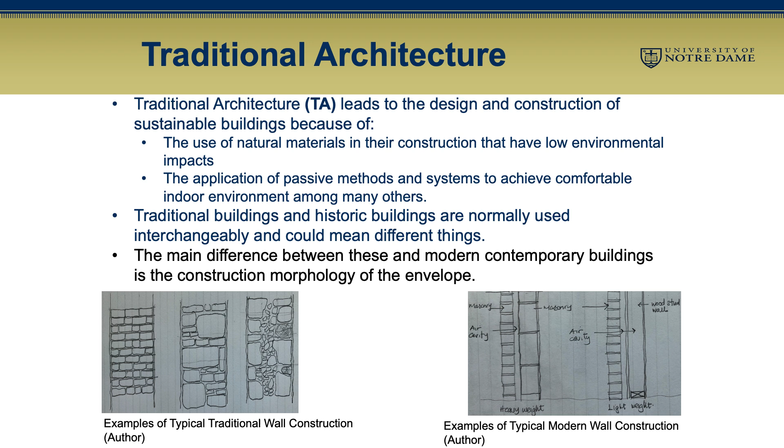On the right side is today's modern construction. We have other CMU with a gap in between. We put insulation and you put a facing on the outside. Or you can have a lightweight construction, then we put insulation inside it, and then you put facing on the outside. This is typically how we do a lot of buildings today.

Now, I am glad that ASHRAE, the American Society of Heating, Refrigeration, and Air Conditioning, which drove the air conditioning system, have come to understand and appreciate that comfort is not just what you measure, but how you feel satisfied. So they have this PMV method for measuring. But there's also the issue of indoor air quality, which talks about the range of temperature and humidity that human beings actually find acceptable.

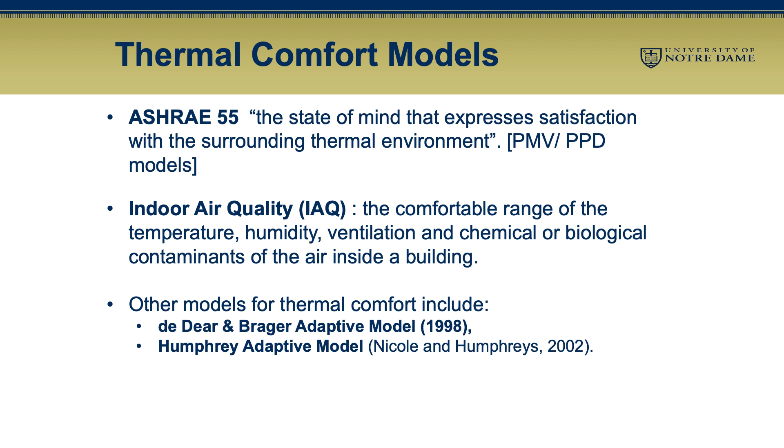Now, people like de Dear and Brager, and also Humphrey, looked at work in India. They said, how come people in India seem to be just comfortable in extremely high temperature according to ASHRAE conditions? And they realized that there's a slight gap in how those models work if you look at it mathematically.

If you look at the lines there, the range of thermal comfort is given by that gap in the middle—that's what we call thermal comfort. The one that is green is buildings that are air conditioned, showing sensitivity to both temperature and humidity, compared to the blue one, which is a naturally ventilated building, where you can accept much higher humidity and higher temperature.

Here in Charleston, it's humid. In the summer, with a porch and a fan, you can actually accept a slightly higher humidity and higher temperature compared to if you live somewhere else in an air-conditioned building.

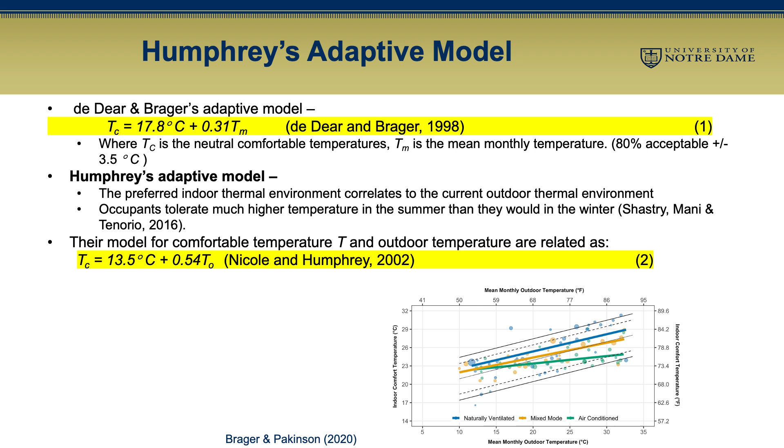So energy performance of buildings here looks at the idea of estimating performance of a typical wall. And the big change is that as we measure existing buildings compared to what's assigned, we find there's a very big value gap between what is published of the material behavior and actual material behavior—which means, should we trust the value they give us for those performances? There's a gap there because it's not just the material, but a material in combination with other things.

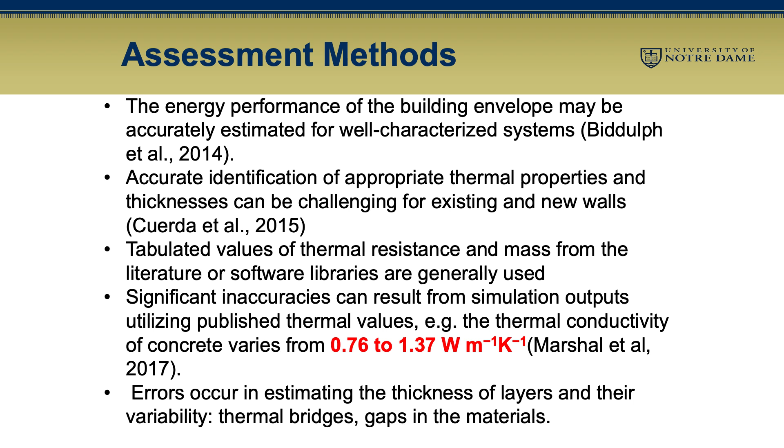So if you're using CMU, for example, or brick, they're giving you a value of brick. They don't add what you use to connect the brick together. They don't add how you connect them together. And that's why there's a lot of faults in this calculation.

So here's an example of different materials. Let's look at highlighted number 9. Paper number 9 looked at thermal plaster, thermal block, and plaster. The thickness is about 0.45 meters, which is about 1.5 feet. The estimated value based on the assigned value is about 0.32 watts per meter squared Kelvin. But actually, when you measure this, it's actually 0.56. So there's a lot more transmission going through than what is being given—there's already a gap there.

If you look at plaster hollow clay block, the estimated value is 0.42 to 1.5, and when you go and measure it, it's actually much lower—so traditional buildings are being assigned a higher value than they actually have. Gypsum rammed earth: estimated value given is 1.58, measured value is 0.35, a very low transmission. Therefore, traditional buildings are not being given the correct assignment based on what is actually measured.

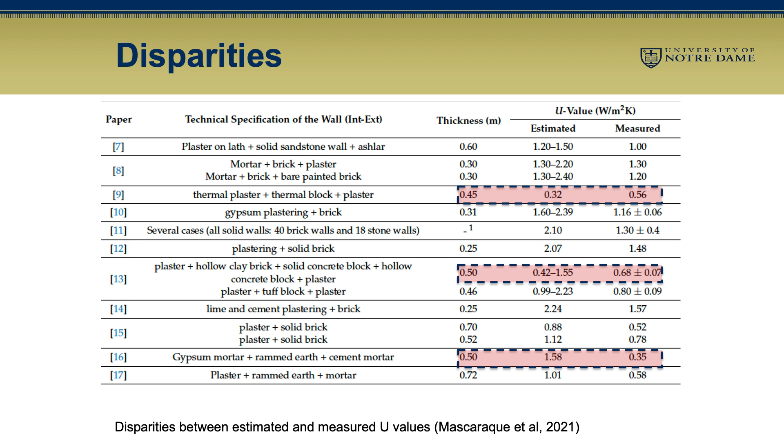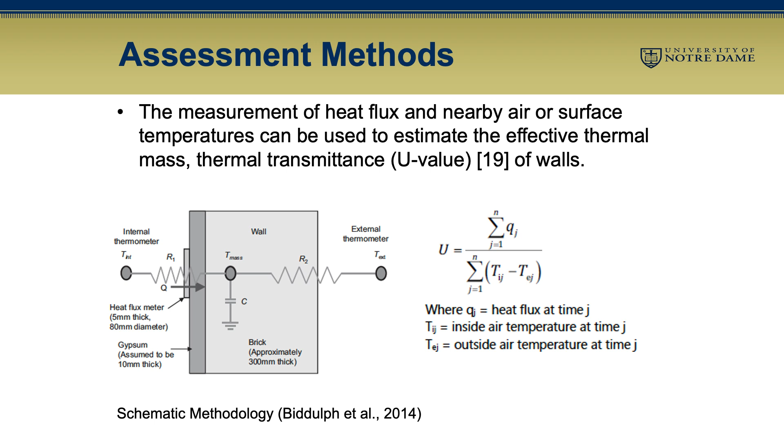So a fundamental way in which we measure these things is very simple. We look at heat flux. We put a sensor on the outside, sensor on the inside, and we measure the temperature differentials. One of the things that we don't quite do with the instruments we use today is to measure how much

energy is absorbed in that particular wall and then radiated. I currently have a PhD student from University of New Mexico who's grappling with this because he's finding that adobe buildings in New Mexico seem to be having a very high U value, especially when the sun goes down, because the sensor on the outside is radiating the heat, and therefore it's telling it that there's actually heat loss of the building. When actually in reality, what it's doing is radiating what it had absorbed, which has not gone on the inside. And therefore we're looking at how can we find a way of calculating this and add this to the system to make sure that we can correct this value there.

So in India, we looked at Guttu buildings. There's several of them in India, about 324 of them. We just looked at only 4 buildings in particular. These buildings reflect the local character in southern India. They're in Mangalore, and they're typically courtyard housing, mainly because the place is hot and humid. Courtyard also because of culture. There's a different level of different groupings of people who can access the house. Therefore, the building actually is layered for different reasons.

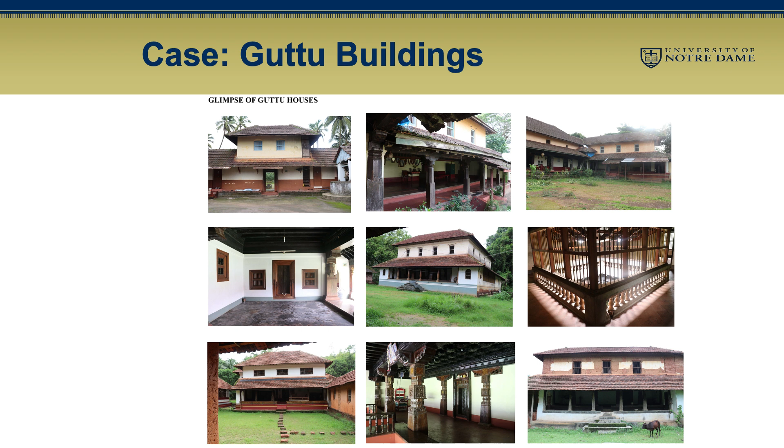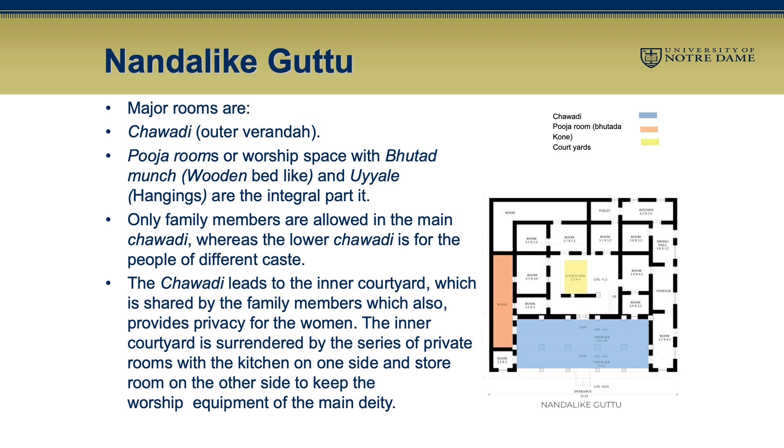So here's examples of some of the Guttu houses. Very simple, they're very large, but can be designed for very small buildings. Traditionally, what you see here is a courtyard in yellow. The front is a porch, and then the rooms surround the building, one layer thick, sometimes two layers thick, but they have natural ventilation right through them.

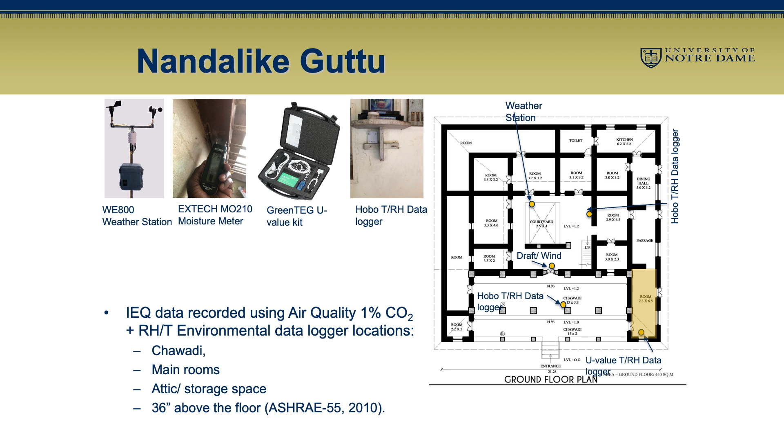And what we did was we put sensors through the courtyard to measure the local temperatures, a weather station. We put sensors to measure indoor air quality in terms of temperature, humidity, and lighting in different locations. And then we put a GreenTEG U-value kit to measure the U-value of those particular walls in 2 locations.

And what we came up with at different times of the year, we measured this over the summer and over the winter. We found out that if you were to use ASHRAE air-conditioned buildings, basically what you're seeing here is that because the building actually has thermal mass, most of the temperatures are falling within what you call thermal comfort. If it was air-conditioned, then you're forced to air-condition that area because they're saying it's out of the range. But in reality, they're very, very comfortable.

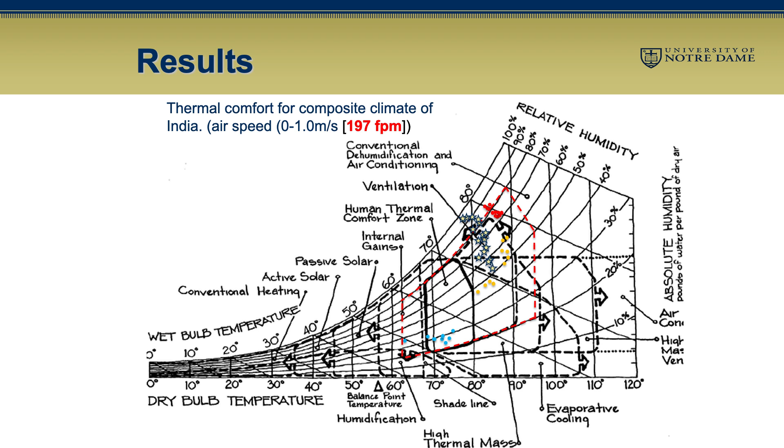The other thing that we see here is that if we go and look at a model done by Olgyay, he did this model in 1963. It's quite an old model. He looked at buildings in Iran, buildings in Turkey. Olgyay was from Turkey when he came to the US to do his PhD. So he looked at these particular areas and said one of the most interesting things in comfort is that if you have wind flow, air movement, then you can actually be more comfortable than at a higher temperature.

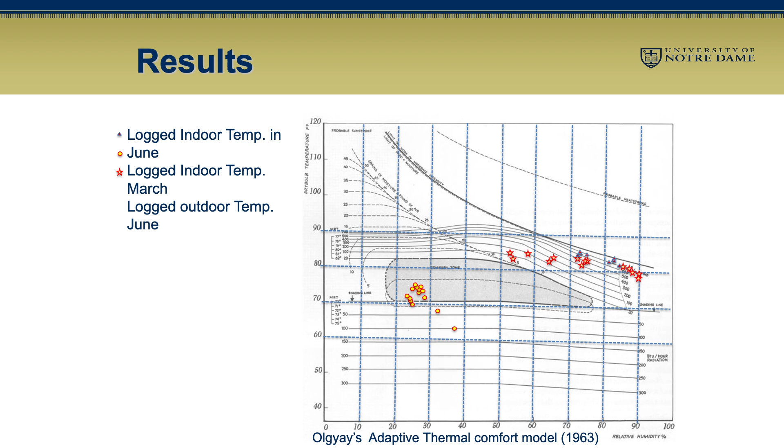So if you look at the range of temperatures in India, for example, over the summer they were actually quite high, outside the gray area of thermal comfort. But because there's air movement, you can tolerate that amount of heat. And that's why when you come down to Charleston in the summer and you walk out of the building, out of the hotel, you start going like this. You're actually increasing airspeed across there. That's what this is doing.

And that's why buildings in the South are adapted to have porches and natural ventilation, adopted such that there's actually airflow, natural airflow that occurs through the courtyard. And that's why you are able to stay in those higher temperatures, which LEED doesn't consider. They will say, no, you are out of the range, you need to provide air conditioning. Get the most efficient air conditioning system to make you comfortable.

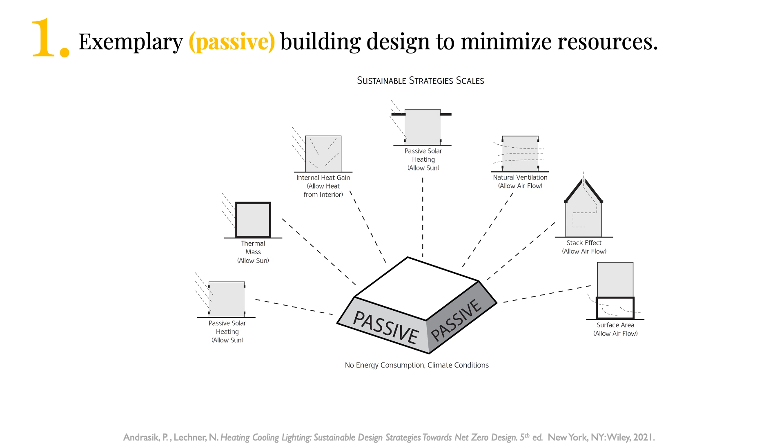Wind, just like my previous colleague mentioned in this presentation. A solar chimney, which is basically a natural way of exhausting heat and providing ventilation. And of course, behavioral strategies are a part of passive strategies also, and the sweater is a very important part of passive design. If your set points in your HVAC don't have to be so extreme, and you're not depending on your HVAC as the panacea for your LEED certification, then the sweater is a very viable architectural strategy. Also, controls, giving occupants controls for thermal comfort, very important.

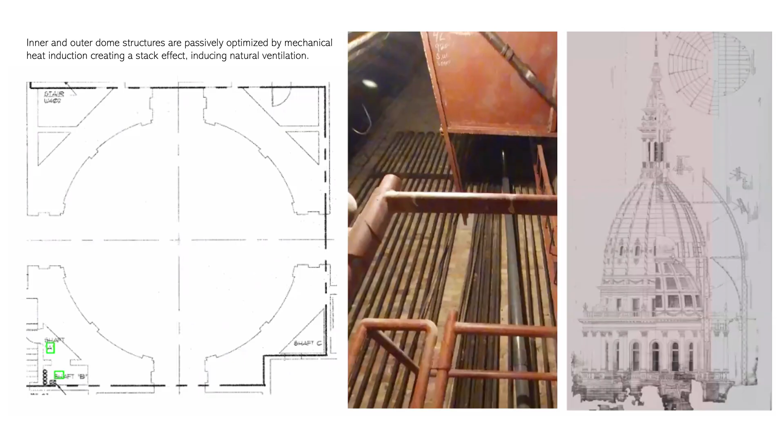Let's look at what this looks like in an actual case study. Let's take the Michigan State Capitol, and one of my very good colleagues, an excellent engineer by the name of Hala Abudab from Loring Engineers, was in this building recently because Loring was awarded and won many awards thus far for doing the HVAC upgrades to this building. But interestingly, what we discovered in this expedition is that the building was already passively designed.

If you notice the middle photograph, those are heating coils, and the heating coils are in the areas on the floor plan that are green. Those heating coils do not heat the building. However, what they do is they are the catalyst for the temperature differential that fosters ventilation. So this is a very simple passive design strategy for air conditioning, bringing in the coolth that's necessary to cool the building through heating coils that create the temperature delta, which moves heat upward.

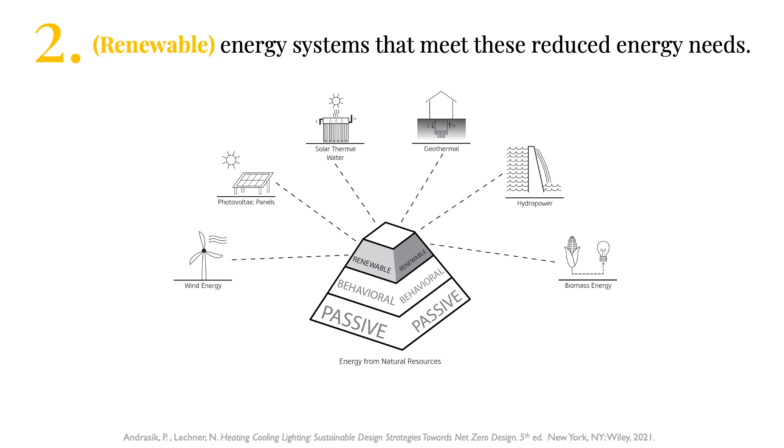The second part of net zero design is renewable systems. So after we've passively optimized a building, and I'm going to give you more case studies of that, now we get into the renewables. We get into, do we use PVs, depending on your region? What do we do for renewables? And also your active systems, lights, HVAC, but that's at the end of the design, not at the beginning of the design. We don't even think about those things at first. You know why? Because the passive design has the ability to decrease energy consumption over 50% of a building if it's done well, early, and thoroughly.

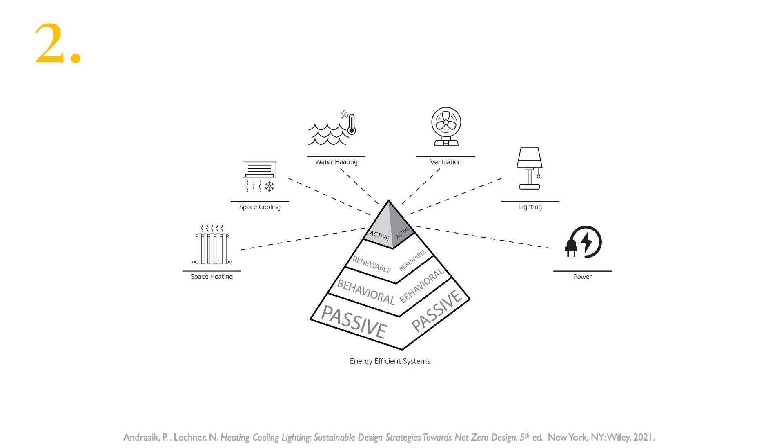So when the building was built, and actually into the 60s, Jacqueline Kennedy was walking by with actually the director of the GSA. And she said, 'What a delightful building.' And he said, 'Oh, it's going to be torn down, unfortunately.' And she said, 'Who would author something like that?' And he said, 'Actually, your husband.' And she said, 'I think I have a sway in changing his mind.' And she did. And since then, the building has been renovated, and recently it has been renovated to be net zero. And I'm interested to show you the passive strategies that went behind that.

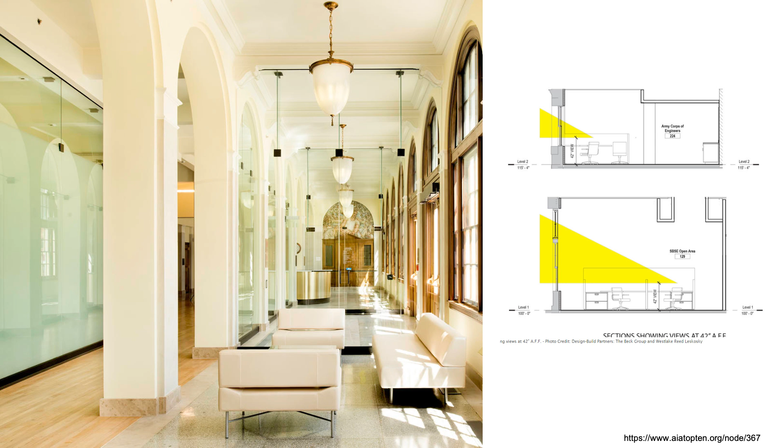This passive-active synergy in this project can be nicely seen as all perimeter zones include design features to allow for a balance of energy efficiency and visual comfort, and I think beauty.

A little bit more detail on the inside, the passive design of the envelope upgrades dramatically increased energy efficiency by adding high insulation without compromising the historical integrity of the building.

Fenestration systems were also replaced, and there was an addition of very R-value intense rigid insulation.

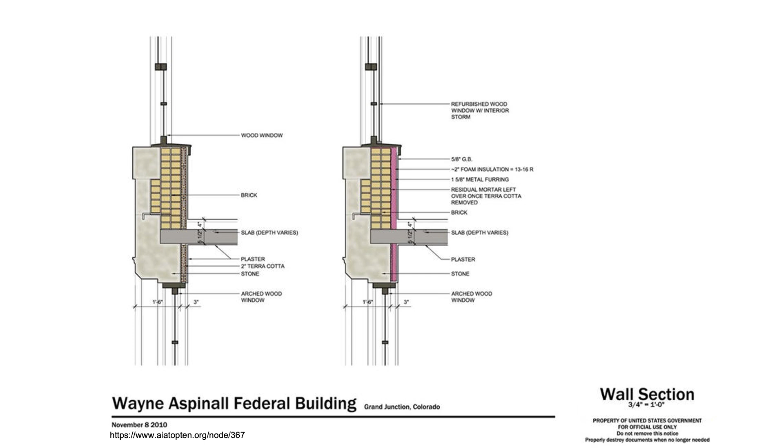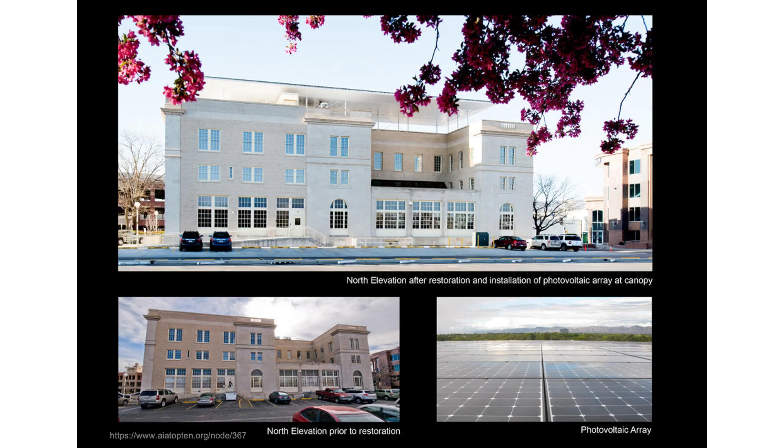You're probably thinking, oh, here we go, Patricia. Here are the renewable strategies, and this ruins the building. Actually not. The PV array that was put on after the passive optimization was so small that when you stand from the bottom of the building, you're not able to see it. So it's actually hidden. This got the building to net zero.

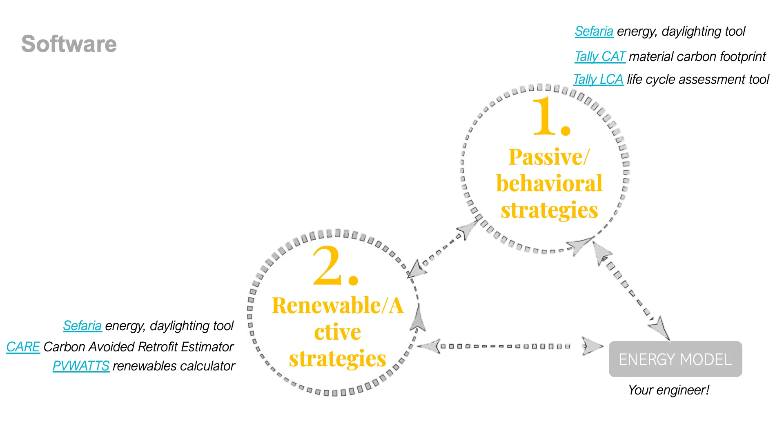The idea of passive and renewable active strategies is integrated into the design methodology needed to design any building, whether it's classic, modern, or traditional. There's software involved in this—you can take a picture of this slide if you'd like. It's software that's simply learned, not engineering-based, but simple enough to arrive at passive optimization before we start calculating how many PVs we need.

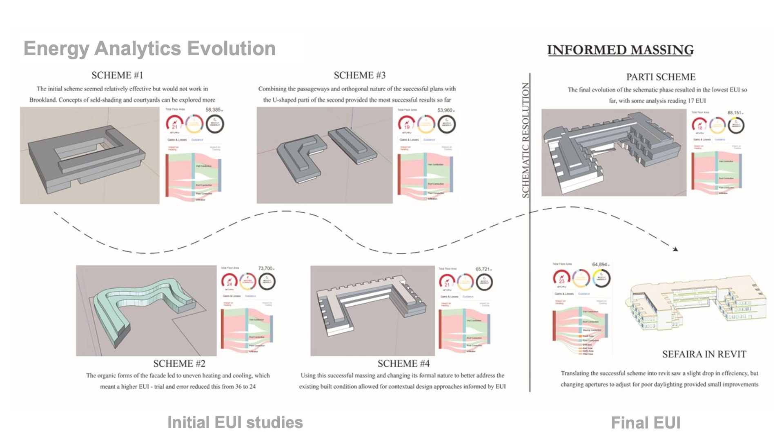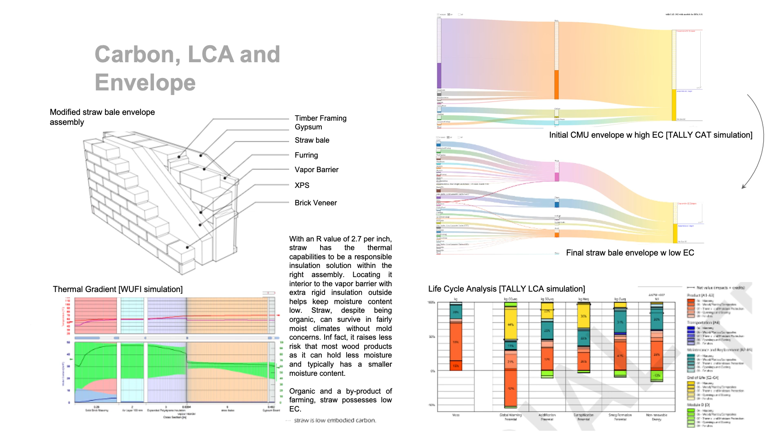I'm going to run through the last couple of slides. These are my students' projects, and this is what we're doing at Catholic. This is a traditional building by one of my students, Liam Maxim. He started off with a box, ran it through simulations of what target EUI he needs, then we looked at carbon, then at materials. The graph on top is a concrete mass option, and below that is a straw bale option. The building looks the same—and this is what it looks like.

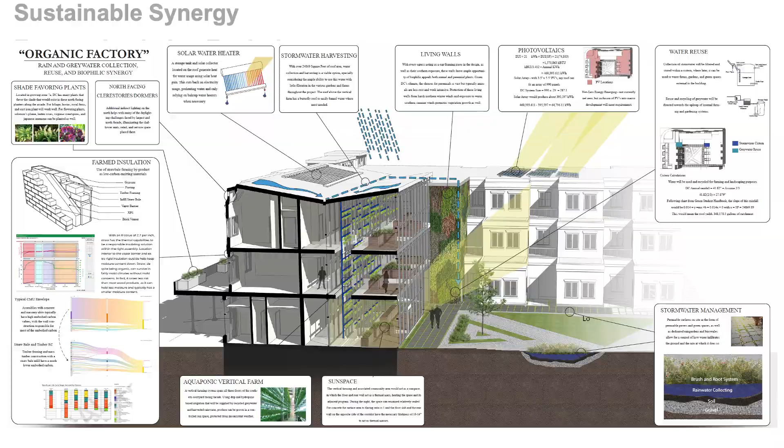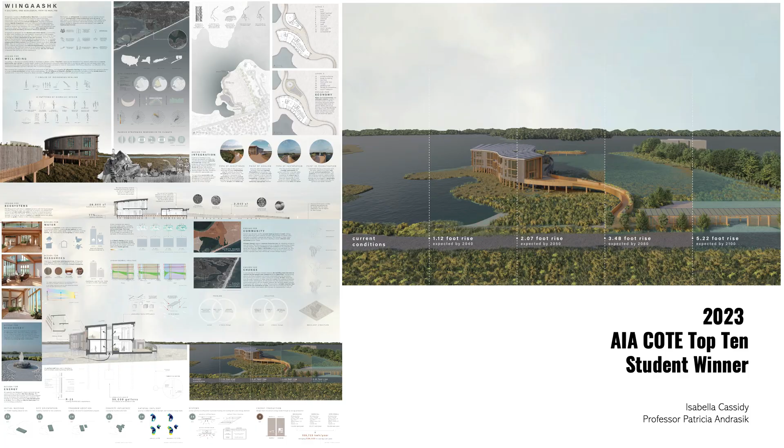These are the Sustainable Synergy Boards, which explain to clients and future clients all of the strategies in the building to get it to net zero. And of course, I'll conclude with a plug for our Master of Science in Net Zero Design program, which is not required to be modern, traditional, or classical—we use everything integrated. One of my students just won the AIA COTE 2023 Top 10 competition with her thesis project, Net Zero. Thank you so much.